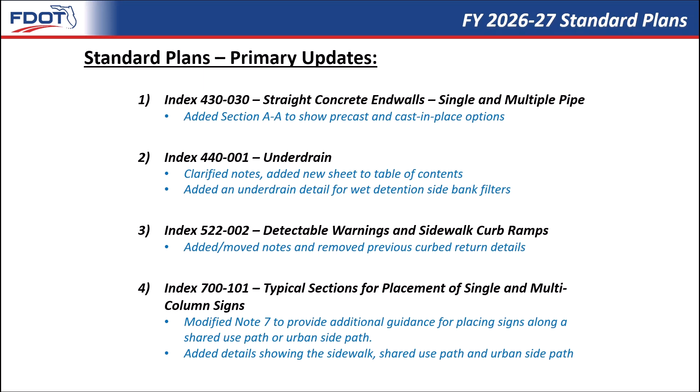Finally, we'll walk through some updates to Standard Plans Index 700-101, where we've modified a note to provide additional guidance for sign placement along various multimodal paths, as well as some general housekeeping items.

Here we have the red lines for Index 430-030, straight concrete end walls, single and multiple pipe. As you can see, Section A-A has been added to show both precast and cast-in-place options.

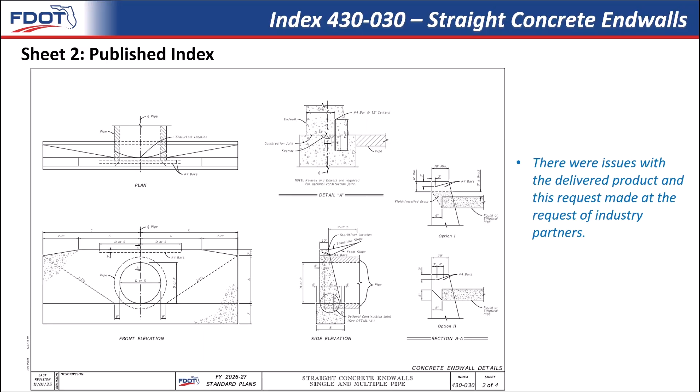This revision was requested via the State Materials Office by our industry partners from the Precast Concrete Structures Association. There were issues with the delivered product, so this addition of an alternate to hole forming and minimum beam height above the opening were included in the index. This update was signed as an approved shop drawing by the state drainage engineer.

And here's a detailed look at that section A-A.

Next, we have updates to Index 440-001 under drain. As you can see in the red lines, the index received a new sheet and the table of contents was updated accordingly. Note 10 was added to ensure an additional 6-inch length of geotextile is anchored under soil or coarse aggregate, and a new type VA wet assembly detail was created.

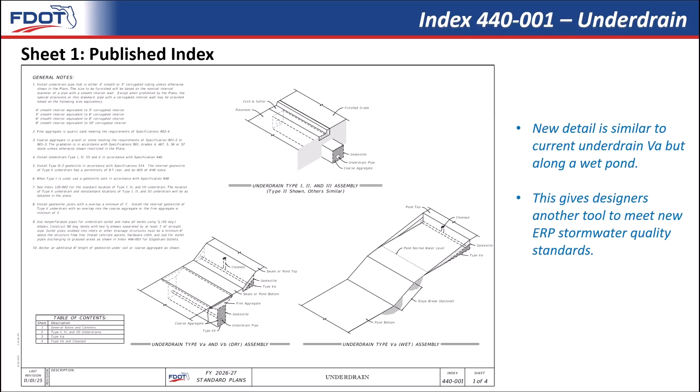Here's the completed published index with those changes incorporated. The new detail is similar to the underdrain type VA and VB, the dry assembly, but occurs along a wet pond. With new ERP stormwater quality standards, this provides designers with another tool to meet those standards.

Here in the red lines for sheet 3, a majority of the changes were to clean up the index and provide consistency with terminology used in other drainage-related areas of our standards. For example, ditch or basin was changed to swale or pond in several locations. Alternative anchor locations and geotextile extensions were also added to the details.

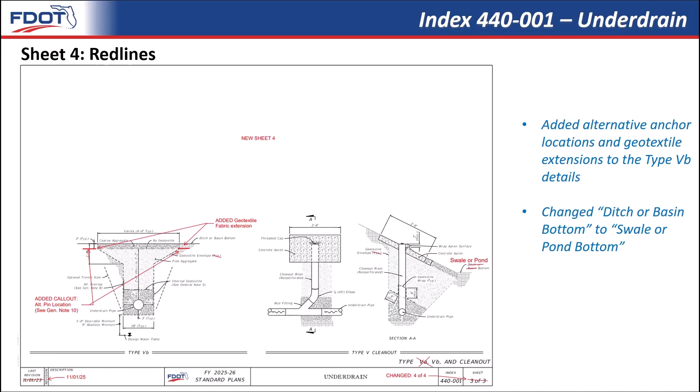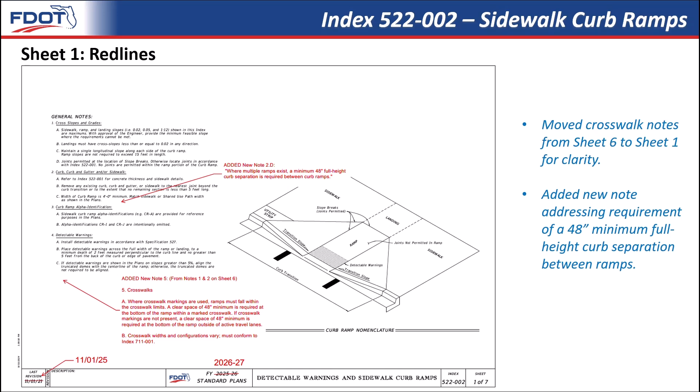Now for index 522-002. Not too many changes made here, just movement of some notes to consolidate all the notes onto the first sheet, with the exception of one railroad crossing note. One note was added to reinforce the requirement of a minimum 48-inch full-height curb separation between ramps where multiple ramps exist.

And here is the published sheet 1. As for sheet 6, notes 1 and 2 pertaining to crosswalk markings were moved to the first sheet, as I mentioned before, while 4 examples of sidewalk curb ramp placement at curbed returns were removed from the index.

This change coincides with the revision to FDM Chapter 222, where guidance and preference of curb ramp placement was provided to ensure a more site-specific design of the ramps rather than one simply selected from the standard plans.

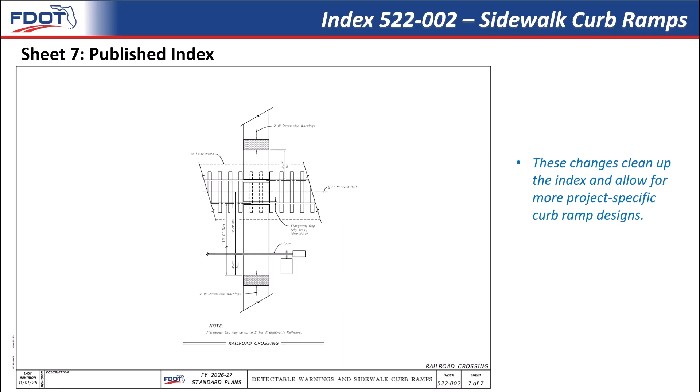Lastly, we'll address Index 700-101, single and multi-column signs. To start, this formerly single-page index has become crowded, so an additional sheet was created to spread out the information for clarity purposes. Details and notes were retained on sheet 1, and the use cases were isolated to sheet 2.

Note 7 was also modified to provide additional information for placement of signs along shared use paths and urban side paths. These notes address avoiding reduction of the accessible width of the sidewalk, providing a 4-foot and 2-foot clear area adjacent to both sides of the shared use paths and urban side paths, respectively. More direction and guidance on these different path types was also provided in the FDOT design manual and will be identified in that update training at a later date.

Here we have the newer, cleaner sheet 1 with the notes and the details, and sheet 2 of index 700-101 with the 10 use cases.

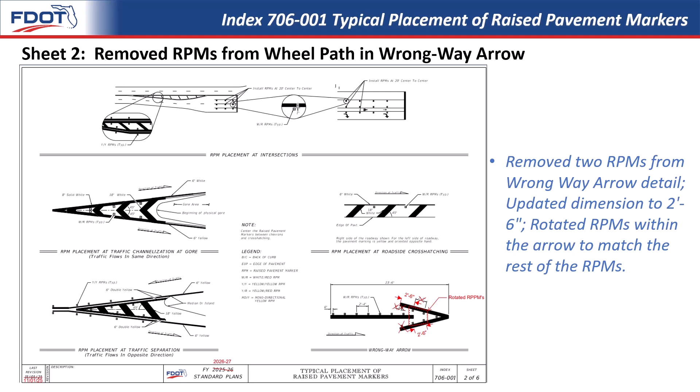Starting off with Index 706-001, typical placement of raised pavement markers, sheet 2 of 6. Here in the red line markup, we see that we removed 2 RPMs for the wrong way arrow detail, updated dimension to 2'6", and rotated RPMs within the arrow to match the rest of the RPMs. Here we can see the updated index with the revised RPM spacing and orientation and the 2 outermost RPMs removed from the wheel path over the arrow.

This change was made in response to district requests to reduce the noise and driver disruption of traveling over the arrow, given the increased usage of these wrong-way driving countermeasures.

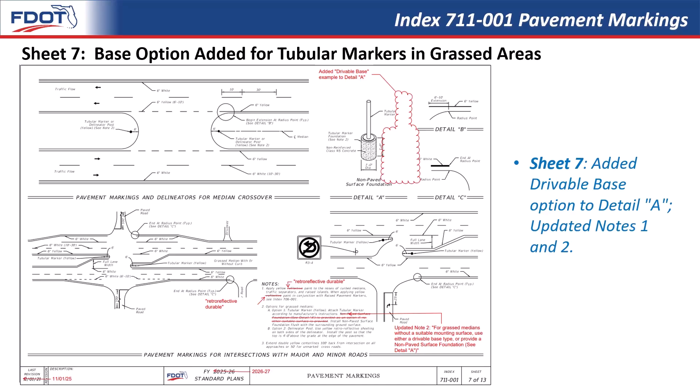Next is Index 711-001, Pavement Markings, Sheet 7 of 13. Here in the red line markup we have added a drivable base option to Detail A, updated Notes 1 and 2. And here we see the new index with an additional Detail A and notes.

This change was made due to requests from industry regarding additional attachment types for tubular markers in grassed areas. It should be noted that these attachment types are not approved for use anywhere other than non-paved areas outside of the traveled way. This change accompanies updates to the standard specifications, now allowing manufacturers with a post passing the Section 991 testing requirements to also add these base options for non-paved areas.

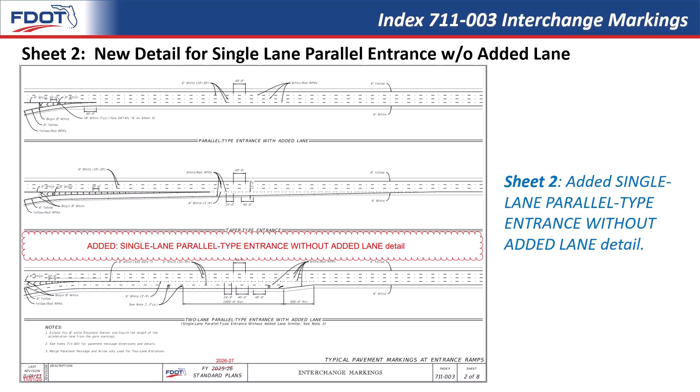Next up is Index 711-003, Interchange Markings, Sheet 2 of 8. Here we have the red line markup showing the added single lane parallel type entrance without added lane detail. And here we have the updated index now detailing a single lane parallel type entrance without the added lane. This change was needed to reduce confusion around the markings used for entrance types when a lane is not added by the ramp.

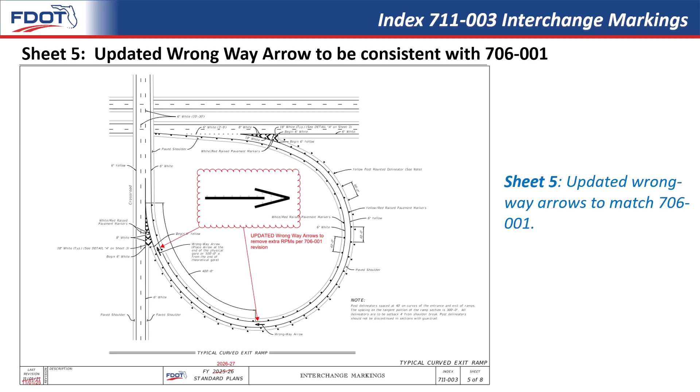Again in Index 711-003, Interchange Markings, on Sheet 5 of 8. The markup here shows that we have just updated the wrong way arrows to match 706-001. And on the new Sheet 5, we now see the updated wrong way arrows with the revised RPM spacing to match the changes to the arrow in 706-001.

Still in Index 711-003, Interchange Markings, Sheet 6 of 8. This red line is a little busy, but it shows that we deleted arrow pointers for 6-inch white lines, changed 12-inch to 8-inch, updated Note 1, added Note 2, added Detail C, added chevron markings to the gores, clarified edge of pavement details, and updated the wrong way driving arrows.

Here we have the updated Sheet 6 with all of the changes. Most notably, the 12-inch white lines have been changed to 8-inch to be consistent with our other gore channelization markings. The 6-inch white edge line along the gore for right-hand traffic has been changed to 8-inch as well to be consistent with MUTCD guidance regarding channelizing lines.

Per the MUTCD, for traffic passing to the right of the gores at the collector end of ramps, the inside edge line adjacent to the physical gore should be a wide white line or a yellow edge line. That determination is based on the size of the gore being outlined. For smaller islands, such as what's displayed in this index, the wide channelizing line can be continued from the theoretical gore right along the physical gore all the way through the movement. For large islands, the channelizing line can be discontinued along the physical gore in favor of a standard yellow edge line.

A second note has been added to this sheet as well to help reinforce the RPM color mandates for whichever option is used. Also in the notes, note number 1 has been updated to clarify the spacing and termination point of the shoulder delineators.

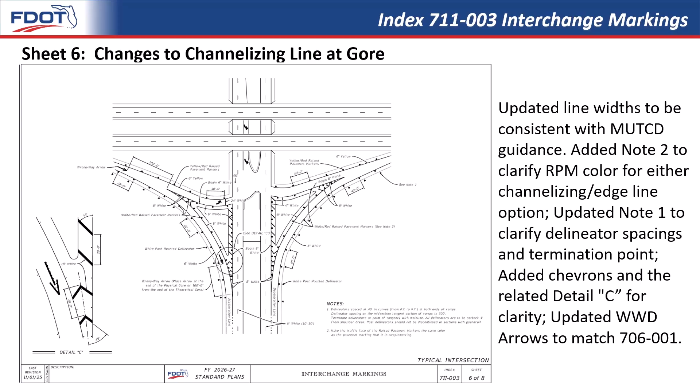Continuing in Index 711-003, Sheet 7 of 8, here are the red line markups showing updated wrong way arrows to match 706-001, and removed edgeline markings from crosswalk areas.

And finally, here we have the updated Sheet 7. As with the rest of this index, the wrong way driving arrows have been updated for consistency with 706-001. Also, a little cleanup was done to remove some extraneous edgeline markings from the exhibit where they pass through the crosswalk.

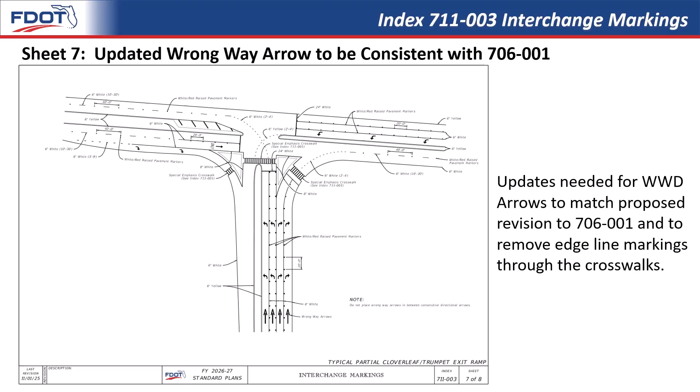Thanks, Ryan. Hey everyone, my name is Shay Gibbs and I'm a standard plan specialist here in the Roadway Design Office, and I've got a few more updates to share with y'all. This cycle, we did a full redevelopment of quite a few of our indexes. These are 4 of them that I'm going to focus on today.

The first one being 550-001. This is our fence type A index. Along with redeveloping, we also added a new wildlife fence detail. Then I'm going to go to 550-002. This is our type B fencing. This one was just a redevelopment that we decided to do along with the fence type A.

Then I'm going to go into index 570-010, shoulder sodding and turf on existing facilities. This one we worked really close with the districts on to make sure that we updated it to more current practices. And then I'm going to go into index 700-102, special sign details. This one is a very large redevelopment, which included renumbering signs, adding new signs, and deleting some of the signs that are in there. Starting off with index 550-001, type A fencing.

On sheet 1, you're going to see a lot of red lines, and I'm going to kind of walk you through some of these changes. We started off by moving all notes pertaining to materials to their respective specifications, whether that be the 550 specification or the Division 3 for steel, timber, and aluminum.

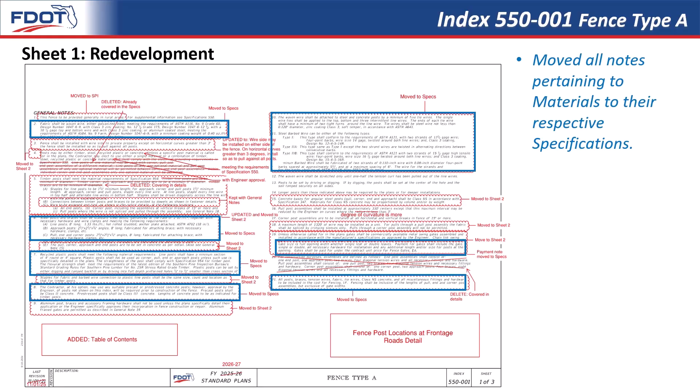We also deleted a couple notes that were already covered in the specifications or already covered in the details within the index. And then because we added that new wildlife fence, we moved the farm fence notes to sheet 2 where we have a full farm fence detailed sheet. And then we also added a table of contents and a detail for fence post locations at frontage roads details.

And I want to point out that we did update this one note. We used to require that the wire side be installed on one specific side of the fence, and we are changing it to allow it to be installed on either side of the fence to allow for the districts or whoever's installing it to make the decision on what's easier maintenance-wise.

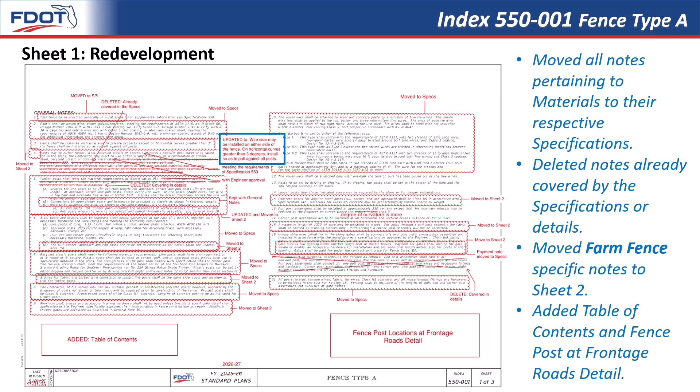Here you can see the full redeveloped index. A lot of the notes are gone, there's much fewer of them, only 10. You can see the new detail in our new table of contents. We're hoping this makes it a little easier to follow along the index.

Going into sheet 2, you can see that we're starting our division between our farm fence and our wildlife fence. So this is our 5-foot farm fence. On this one, you can see we moved the design note to the standard plans instruction for the designer. We also rearranged the index and added a couple more details along with those notes.

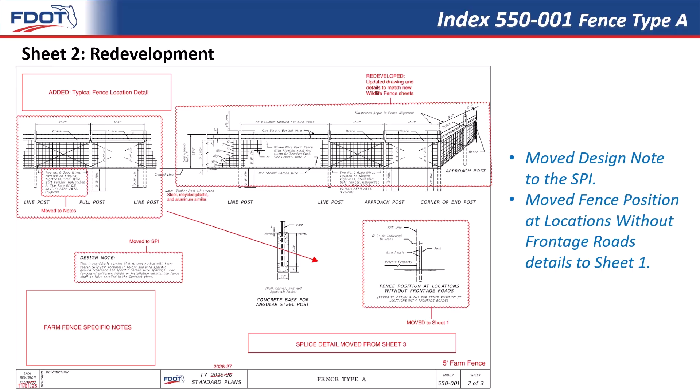You'll see that on the next slide here it looks a lot busier, but it does cover all the details needed for a 5-foot farm fence. You'll see that we added a sheet title to make sure that it's very clear what this index sheet entails. We also added this typical fence detail at the top, which aligns with the rest of the index and gives you a clear view of how the fencing is laid out.

You can see that these details have a little more detail to them, a little more aesthetic detail with the shading. To make it easier to understand and see, we took out some of those larger callouts and moved them into the notes. And then in terms of the dimensions of the fence post, we have it matching what you'll see in the wildlife index.

And then we have our farm fence specific notes over to the left. I also want to note that while you see the 8-foot distance on the details to the right, if you look in the typical fence detail, you'll see that there is an 8-foot typical distance, but you can go up to a 14-foot max.

On sheet 3, this is just a farm fence specific detail sheet. You can kind of see where we moved the fastener and timber post and brace to the last sheet. We moved the splice details up, which you saw before, and made this more just for concrete posts and braces.

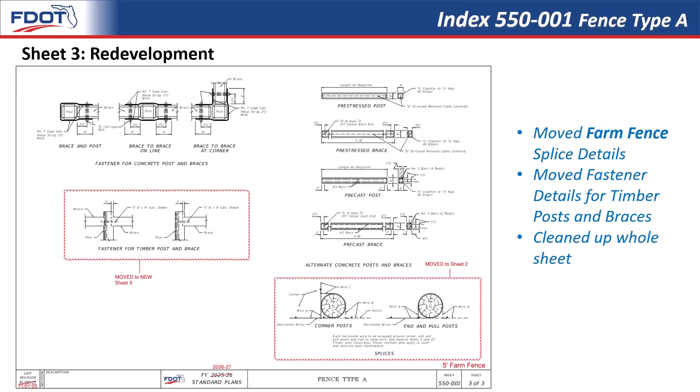This is a 10-foot fence instead of a 5-foot fence. It's much larger. It has a larger gauge fence fabric, more barbed wire along with a larger gauge barbed wire. And I also want to point out that this fence in specific is timber only. Our farm fence covers recycled plastic, concrete, timber, steel, aluminum. The wildlife fence is a timber-only fence.

These details were developed with the help of District 3. They developed them when they were cleaning up from Hurricane Michael and found that these became a bigger need, which is why it got added into our indexes for all districts to have availability for it.

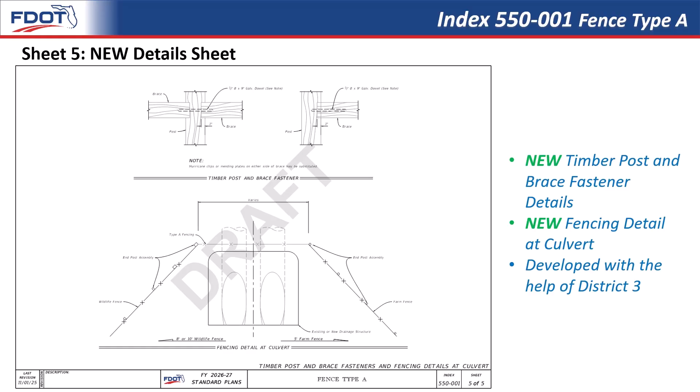And then our last sheet are just some more detail sheets. You can see where we brought in the timber post and brace fastener from that previous sheet. And then you have the fencing detail at a culvert that looks very similar to our typical fence details that you can see on sheets 2 and 4. But this one covers both wildlife and farm fence in the detail.

Next, I'll cover Index 550002. This is our Type B fence. This one just was more of a focus on cleaning up and doing very similar things that we did to our previous index, like moving all of the materials notes to their respective Division 3 specifications, along with moving design notes to the SPI and updating some of the language to plain language, and then adding a table of contents and the same detail of the fence post at frontage roads detail like we had in Index 550001.

Same thing here with sheet 2. You can just see the red lines where we move some of the design notes along with updating the language.

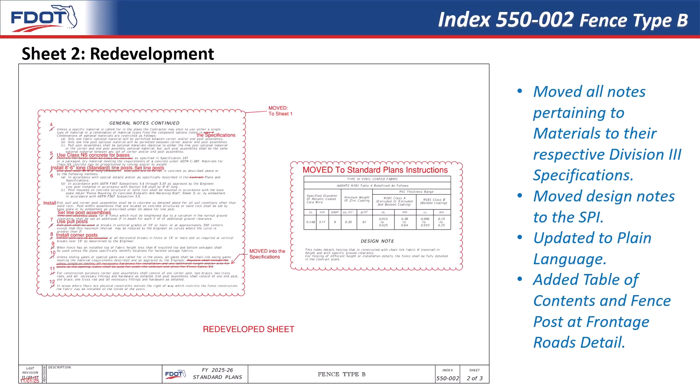Sheet 2 is just some general redevelopment and cleanup. We didn't change much of anything.

But here is the new sheet. You can see we divided up the details into their own sections, making this very similar to how we have our other indexes.

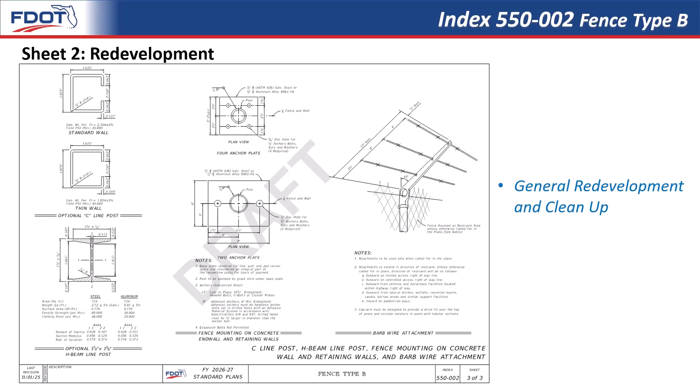Specification 954 is where you'll find the timber requirements. Most of those are covered in the index, but there are a couple that just fit in the specifications, like the flexural strength requirements, and then we also added in some APL requirements.

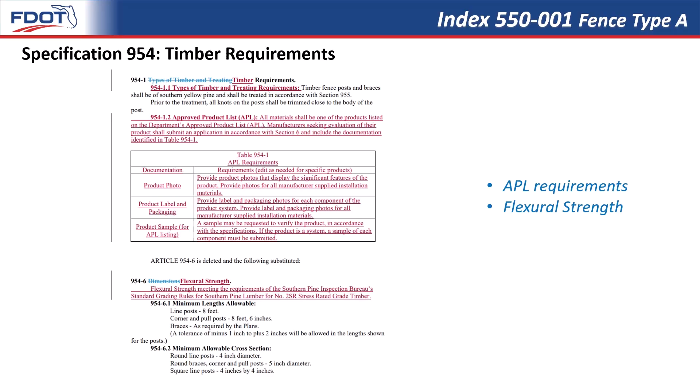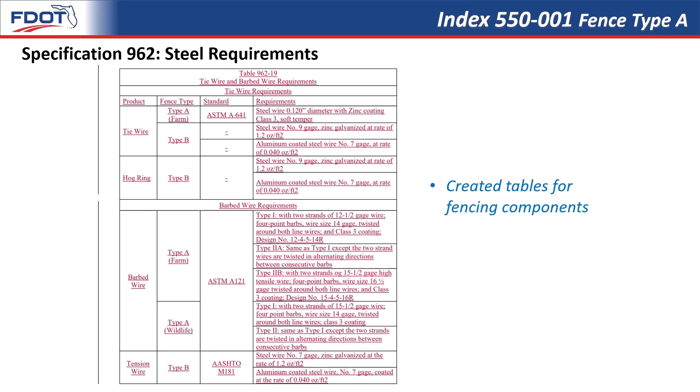The steel requirements, on the other hand, had a ton of details that got moved into the specifications. So you'll see in 962 there is a full section for fence materials, and it breaks out into quite a few tables: APL requirements, fencing fabric requirements, steel post, beams, and pipe tube, and then tie wire and barbed wire requirements.

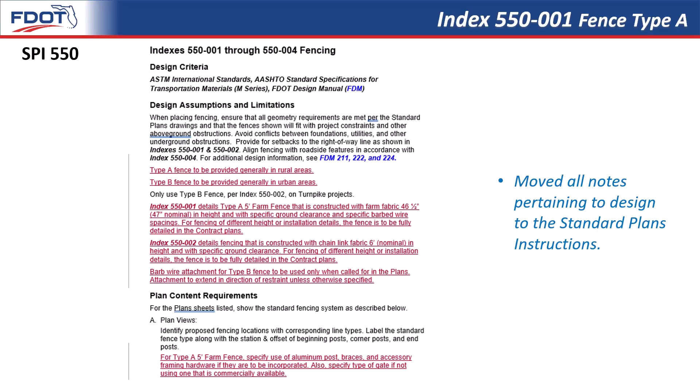Next, we're going to go into Index 570-010, shoulder sodding and turf on existing facilities. This one also went through a large redevelopment from requests from the districts.

We were told that treatments 1 and 2 are not very commonly used, if used at all anymore, so we took those out and replaced them with asphalt overlay details, a shoulder widening detail, and a super elevation detail. To assist with those, we also added a drop-off detail and a sloped sod lap detail.

Trenching or mixing will be necessary when existing turf is flush with or higher than adjacent pavement. Shoulder drop-off soil will be necessary when existing turf is lower than the adjacent pavement, so you'll see this shoulder drop-off soil coming up a lot in this index now.

We found that we needed something to cover the makeup soil needed to bring the dirt up to the pavement level that we need. While Borrow covers that, sometimes that makeup soil wasn't covered properly anywhere. So we established shoulder drop-off soil as a pay item in this index and the specifications to make sure it is understood when to use this type of soil as opposed to Borrow.

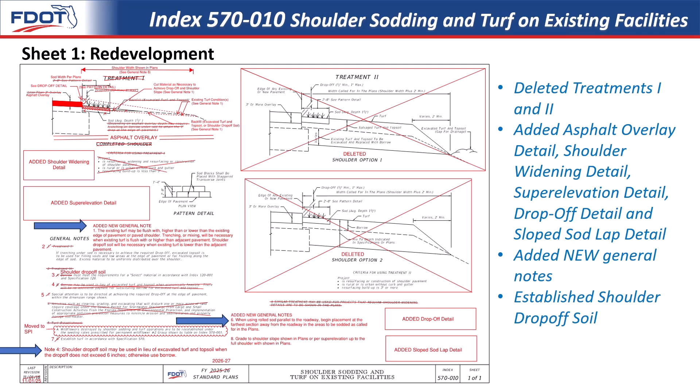And then here you can see this index has completely changed. We have our new details. We have our new notes.

One thing I want to point out is in that pattern detail, this shows palletized sod, but we also added in a note for the minimum 3-foot sod width for rolled sod, as you do have the option to use both.

We also added some language into our standard plans instructions to give a little more guidance and clarity. One of them being for shoulder drop-off soil, assume an average of 250 cubic yards per lane mile of shoulder requiring correction. Adjust as necessary based on field conditions and district experience. Include average cubic yard per lane mile of shoulder amount in the summary of earthwork design notes column. So this is just to help you with your estimation and your quantities.

We also added in a little more language in terms of the sod width with the palletized sod and the rolled sod, making sure that you understand what is typical for those. And then you will see that we very specifically tell the designer to include the shoulder and sod width in the plans along with the shoulder slope.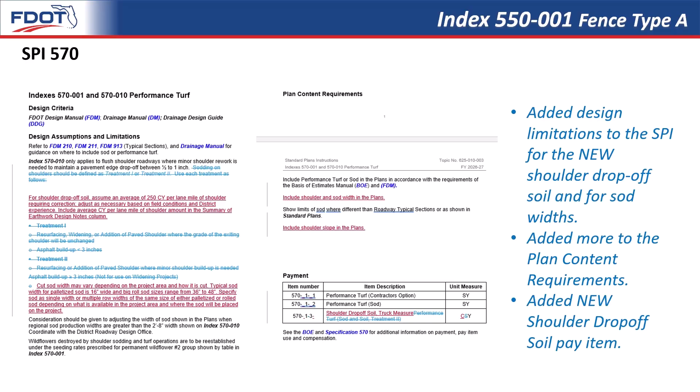And then down in the payment, you can see we added in that brand new shoulder drop-off soil per truck measure payment item.

To help with all of those new details, you can also see we added some language into the specification 570. A lot of this has to do with that new shoulder drop-off soil. It kind of helps understand the testing along with where to put it, along with the quantities.

Specification 120 clarifies very specifically that testing and how if the plans indicate the use of drop-off soil, then no further testing is required.

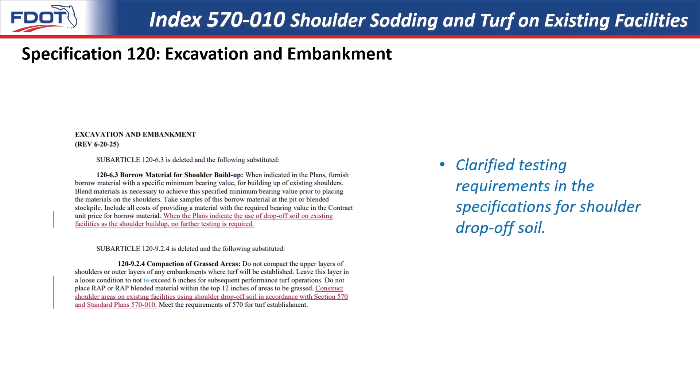Going into index 700-102, this is our special sign details index. I wanted to start with our brand new sheet 1 because this kind of kicks off the redevelopment of this. We did go into renumbering all of our signs based on what is covered in the sign library, the traffic engineering manual, hoping that it'll make this easier to go through the index from now on.

So you'll see we have our numbering convention to help with the renumbering with the FTP and new TTC signs. I'll get into that in a second. But it has the FTP or TTC, your sign type, which you can find next to that in our sign type block there, which covers regulatory, warning and advisory, motorist service, guide, recreational and cultural, miscellaneous, and then our temporary traffic control signs. It then has, you see B and C.

This is kind of our size adjustment or our left and right adjustment. And then all of our new signs currently had the year of update, which would be 2025, which is this year.

We also provided a few examples to make sure that that is very clear. And then you'll see our table of contents, which helps identify where you need to go within this index, considering it is a 21-page index.

And then we added in a crosswalk at the end. So that way, if you go and find one of the older signs, it's very easy to find the new sign number that correlates to it.

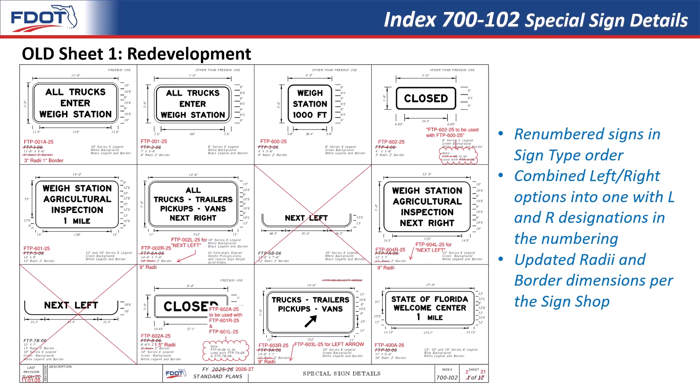On the old sheet 3, this one had a couple other details added along with the renumbering. One of them being note 4, which states that the width varies on the border depending on the digits within that sign. You can see that because it states that the width on the border for the 3 or more digits is E, and then we have our different sign widths in that table below.

The old one gave a very strict 7/8 border, but we wanted to make sure that it is very clear that this is an adjustable border based on the digits within it. We also added a little more clarity over to our county route markers, stating that the Series D legend numbers and letters are all uppercase.

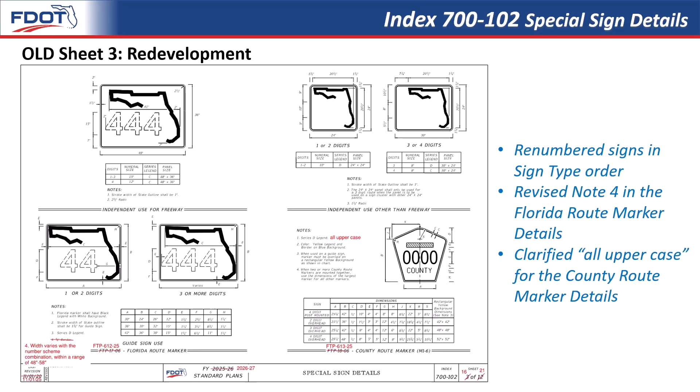On our old sheet 9, I added this one to show that while we have our left and right, we also have our U-turn sign, which we designated with the letter U instead of L or R, down at FTP 034U25.

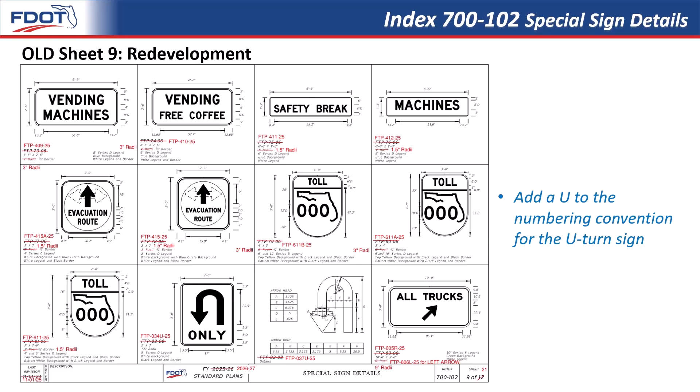On the old sheet 10, all we did was delete this left turn yield on flashing yellow arrow sign. This one is already covered in the MUTCD and no longer needed in this index, because this index is very specifically Florida signs and does not cover MUTCD signs.

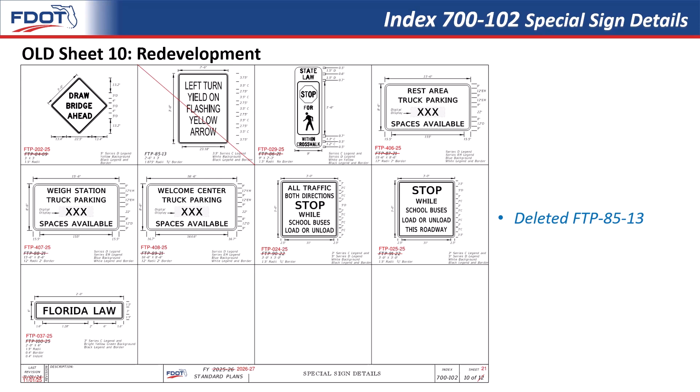We'll start with some of our newer sheets. This is our new sheet 2, which comes right after sheet 1 with the tables and table of contents. The new sheet 2 is our regulatory signs, and on this sheet we added 3 new fender bender signs.

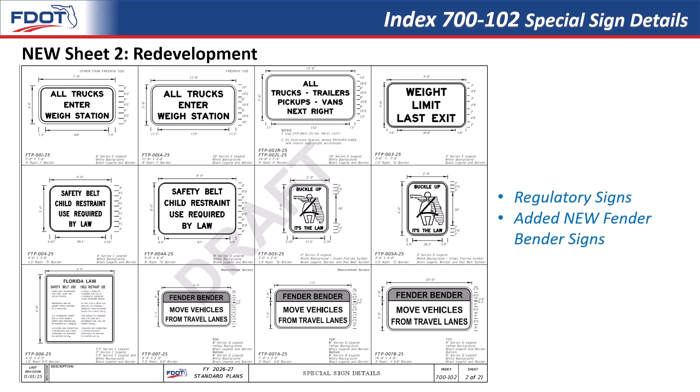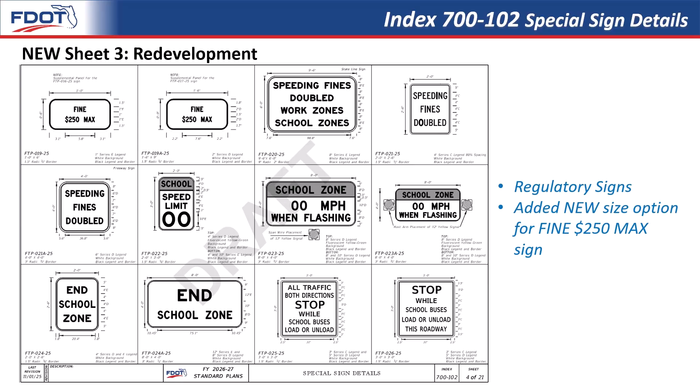On the new sheet 4, also regulatory signs, we added a new size option for our Fine 250 Max sign. On the new sheet 5, still in regulatory signs, we added some new crosswalk signs: FTP 02725, FTP 027A25, and FTP 02825.

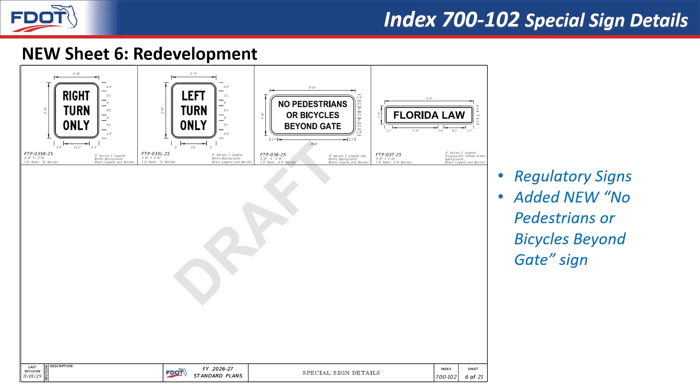Sheet 6 is the ending of our regulatory sign type, but we added a new sign for no pedestrians or bicycles beyond gate.

Sheet 7 kicks off our warning signs. We added a new crossing sign, a new on-sidewalk sign, and a few new motorcycles-use-caution signs, which have a few different size options.

Sheet 8 continues our warning signs, and this covers our new prescribed burn ahead signs.

Sheet 12 goes into our motorist service signs. On this one, we added 3 new share-a-ride sign options along with some new emergency info sign options.

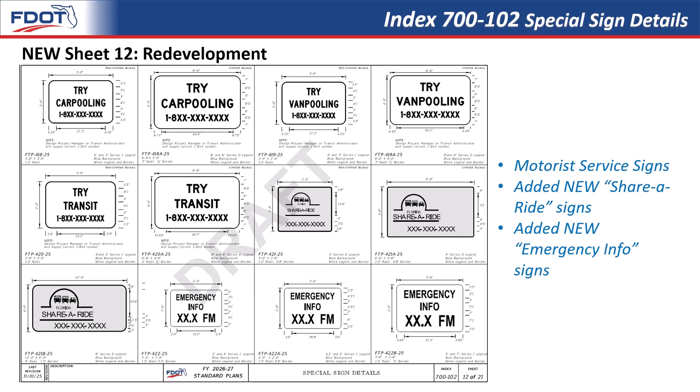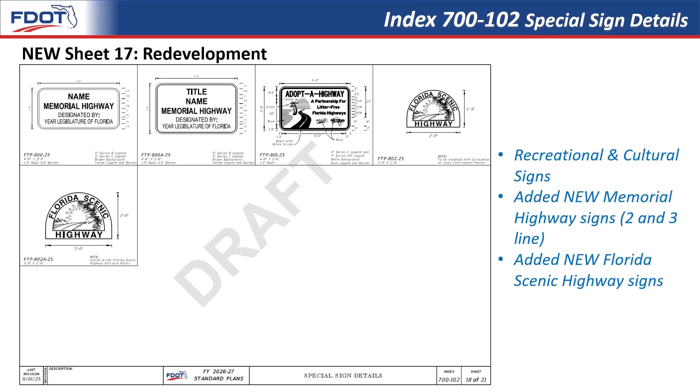Sheet 17 goes into our recreational and cultural signs. We added the 2 new Memorial Highway signs—you'll see it has the 2-line and 3-line option. And then we added our Florida Scenic Highway signs, which also have 2 options.

Sheet 21 is our temporary traffic control signs. These are just the new ones we added: our reduce speed, smoke ahead signs, and other motorcycle-use-caution signs. I want to be specific that these are pink signs, whereas the other ones are orange signs—one is for temporary traffic control, and one is another option for our roadway signs.

And here's just a glimpse of our crosswalk at the end of the index. This covers all the renumbering and makes sure you know exactly where to go if you're looking at an older index compared to our newer one.

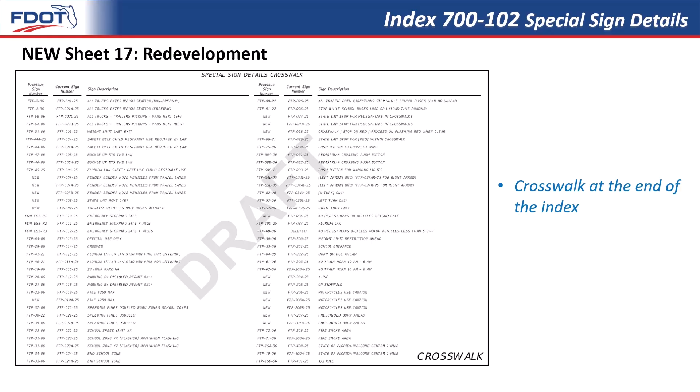Thank you, Shay. My name is Richard Stepp with FDOT Central Office in Tallahassee. For the 2026-27 Standard Plans Update Cycle, I'm primarily responsible for the following.

Type K temporary concrete barrier, adjacent barrier inlets, curb and gutter barrier, concrete barrier, guardrail transitions, post and beam bridge railings, and the larger standard of guardrail. First, we'll look at Index 102.110, Type K temporary concrete barrier, where we've added compatibility for single slope barriers and clarifications to our general notes.

Taking a look at sheet 1 for Type K temporary barriers, we've updated the note heading. It used to mention something about Thrie beam; we changed that so now it says connection to permanent rigid barriers. Per the specs, anytime we're talking about rigid barriers, we're talking about concrete barriers or traffic railings. To be more helpful, we've referred the user to sheets 7 through 10, where you'll find all the various connections to those concrete rigid barriers.

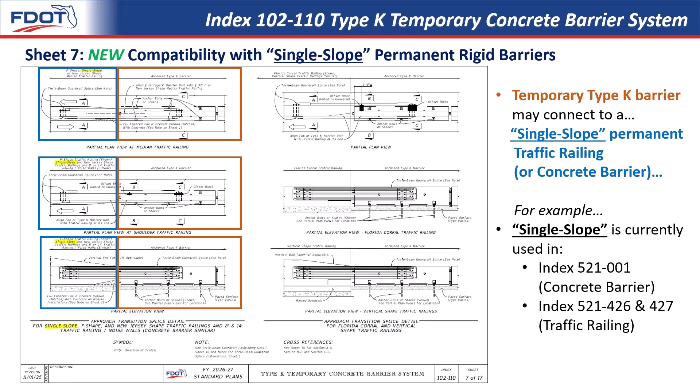The temporary Type K barrier is seen here on the right in the orange rectangle, and the single slope as the permanent traffic railing or concrete barrier is now seen here on the left. For example, single slope is currently used in the new Index 521001 for concrete barrier, and also in Index 521, 426, and 427 for traffic railing. We're going to take a look at 521001 in upcoming portions of this training, so you'll get a feel for what the single slope barrier looks like.

Here we're showing sheet 8, essentially the same thing in reverse direction. We've added the new single slope option to the permanent barrier as something the Type K barrier can connect to. There are several other sheets in this index showing the same thing—just know that the single slope shape as a permanent barrier is now an option throughout.

Now something that's not a revision, but we've been requested to add a reminder for designers and EORs when choosing temporary barriers for your plans. We've recently noticed that some designers are adding too much information in their plans. The standard plans instructions, the SPIs we're looking at here, basically tell designers what not to specify—we don't want to provide too much information or limit the contractor on what they can do.

Part of this SPI, shown in the red rectangle, says designers should not specify the type of temporary barrier outside of the options shown in the standard plans. For example, the designer should not write concrete, not write steel, not write water-filled barriers—not narrowing the contractor down to what they can use.

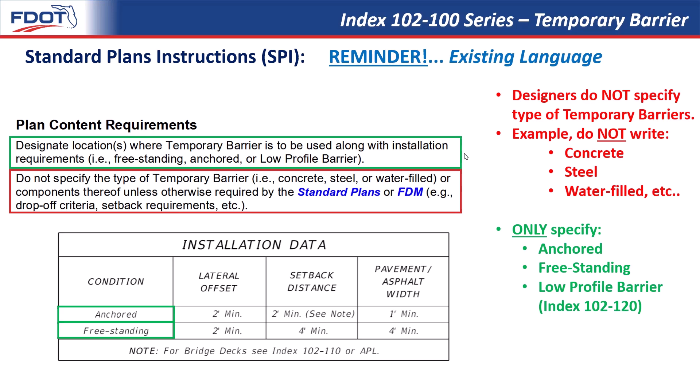So basically the designer would only specify what is shown in the standard plans, and for type K temporary barriers and most other barrier types used for most situations, the only two options are anchored and freestanding. That narrows down what the setback distance would be depending on if you choose anchored or freestanding. An anchored barrier reduces the setback distance. The other type of barrier, which activates a different standard altogether, is low profile barrier. So these are the only three options you'd be calling for in your roadway plans: anchored, freestanding, or low profile barrier. This is information taken directly from the standard plans instructions, so if you need help remembering that, please take a look at those SPIs.

Up next, we're going to take a look at index 425.031 for adjacent barrier inlets. That naming convention basically means there's a barrier adjacent to that inlet. This naming becomes even clearer when you look at the other standard indexes right next to it: median barrier inlet, where the inlet is integral with the median barrier itself, and curb and gutter barrier inlet, where there's a curb and gutter type of barrier with the inlet also integral to that. So for 425.031, it means there's an adjacent barrier right next to the inlet.

A picture's worth 1,000 words, so here you see the inlet right next to that concrete median barrier. The two are not part of the same structure, but the barrier is just immediately adjacent to that inlet. Taking a look at this isometric view, the major change we made for this update cycle is a clarification coming from our drainage office.

We really wanted to emphasize that there's a 2-inch depression, also known as a warp or transition, that's required for stormwater collection. This has always been required in past standards, but it may have been a little more obscure with how it was listed in notes and shown on details. So we wanted to bring it to the forefront. In this isometric view, it's now clearly shown along the vertical portion of the barrier. Once you go below the gutter line, the barrier face that gets exposed is vertical, so now you can see this little indentation in the isometric view fairly clearly.

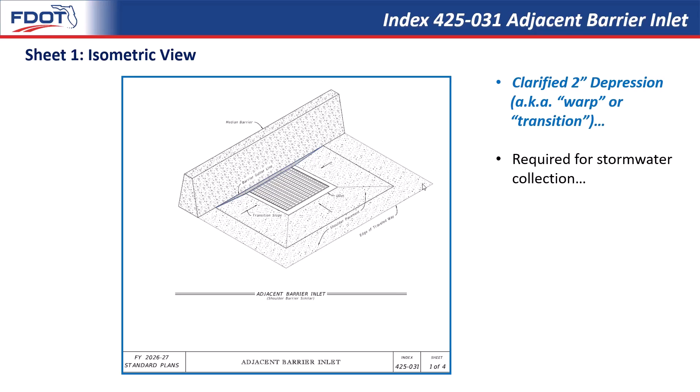It's important to note that this 2 inches is measured from the barrier gutter line, as we've highlighted. In index 521001 for concrete barrier, we highlight that gutter line in various locations very consistently throughout the standard. It's basically the point where the single slope barrier face comes down and turns vertical as it goes beneath the surface of the finished grade. Right at that point where it touches the finished grade is considered the barrier gutter line. For this special case of the barrier inlet, it basically drops 2 inches below the normal gutter line, which will always just go in a straight line. So that 2 inches is measured from that, staying consistent throughout index 425031, just like we're consistent in 521001.

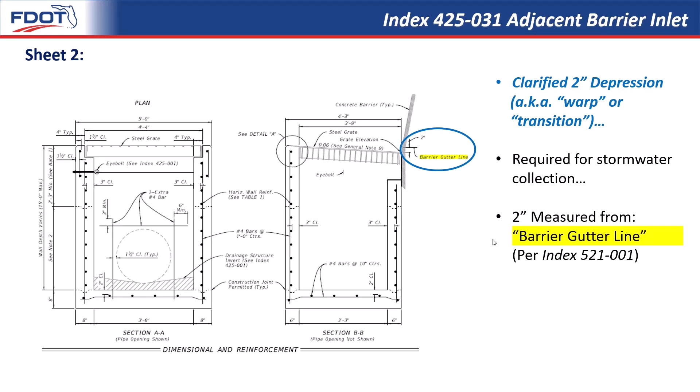Now taking a look at the next page, you can see a section view. It's essentially showing the barrier gutter line, called out right here at the top. Then you've got your clear 2-inch dimension showing where the top of the inlet falls when it goes up against that barrier. I'll note that in the previous year's standard plans version, there were a lot of other notes referring to some obsolete information, so we went ahead and cleaned that up to where we're only showing this 2-inch dimension. Now it becomes very hard to miss for the contractor.

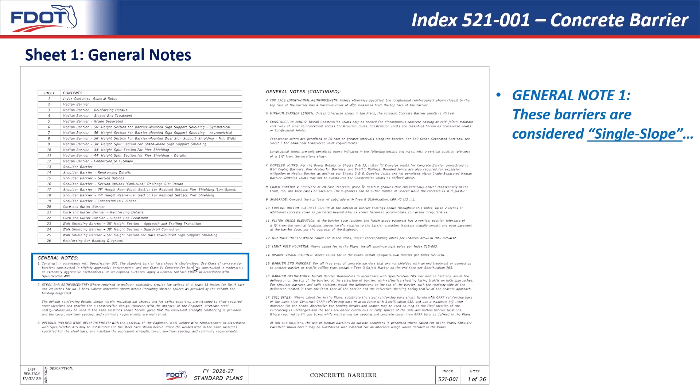But it's good from a contract point of view to square all these things away and have that connectivity. So for example, when you're looking at index 102-110, like we just talked about, with the temporary barrier connecting to the new modern barrier, we can just go ahead and say it's compatible with single slope. Now single slope is mentioned in this new barrier standard, just to verify that that's what we're speaking of.

Also, the traffic railing that goes on bridges is actually labeled single slope traffic railing in the title of the sheet, so that one's a little less obscure. But concrete barrier, in addition to obviously looking like a single slope barrier with one slope going down the face, we went ahead and called it out in General Note 1. That way there's never a doubt moving forward.

General Note 7 is talking about dowel joints—that's also on the next slide, I'll show you what that looks like. Speaking of General Note 7, dowel joints, we wanted to make a note now, and even though this was already stated in the past, we just clarified it even further, saying that dowel joints may not be substituted for construction joints. It's two different concepts.

A construction joint is basically where you stop and start the casting of the concrete. It has to have continuous reinforcing steel going across the joint. It's different from a dowel joint, which simply has dowels going across the joint—that's defined for a specific usage. So General Note 7 says you can't substitute dowel joints where there needs to be a construction joint. We heard that some contractors were trying to take advantage of that, not understanding the difference between construction joints and dowel joints, which are listed for different usages in two different notes. So those are not the same thing.

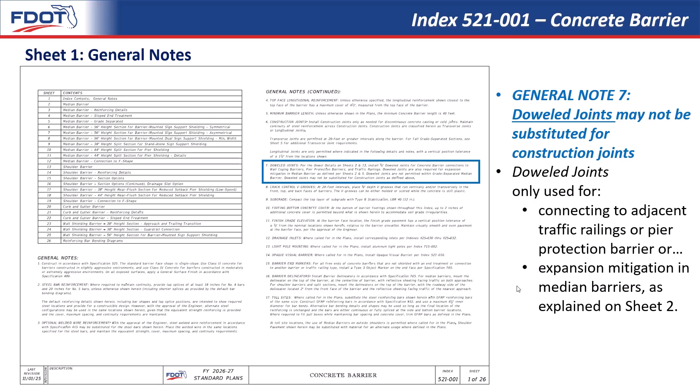They're only to be used or explained basically for connecting to traffic railing, which is something different, or for expansion mitigation within the spacing range that's called for. We'll go ahead and explain that on the next sheet.

Previously, only the maximum spacing of 100 feet was given. To assist with the expansion mitigation, the maximum would be the concern that governs. The idea was that contractors would not want to use these more than they had to, so we limited the maximum size. That said, we had heard that maybe some contractors are taking advantage, so we went ahead and reined this in a little bit.

Now a minimum is given to assist with preventing the misuse and violation of the minimum barrier length, which is 40 feet. That 40-foot minimum corresponds with the minimum barrier length of 40 feet. So in summary, there's now a clearly defined range that can't be misinterpreted, where the expansion joint needs to be placed within a 40-foot to 100-foot spacing. Generally, it should be towards the high side wherever possible.

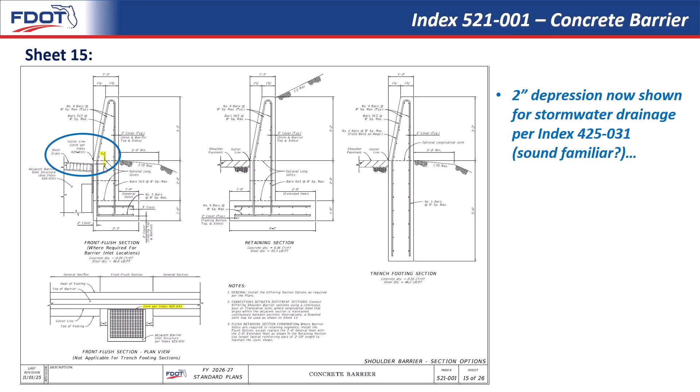Now shifting gears, looking at sheet 15, we again have our 2-inch depression, which is now shown for stormwater drainage per index 425-031. This should sound familiar, and the drainage group is happy about this - it clearly shows all locations that that inlet is 2 inches below the gutter line, which is the result we should get now in the field consistently.

In this slide we highlighted the gutter line, basically the bottom of that single slope shape, and then this is where it goes vertical. Where it goes vertical on the concrete is typically where the shoulder pavement and the finished grade would be. That gutter line is called out consistently in all locations throughout the standard. In this case, if there happens to be an inlet there, then finished grade is a little bit lower because finished grade is the inlet itself, and that goes 2 inches below. This all ties together with index 425-031 nicely.

Okay, so we're making good progress - 2 standards left. Up next is another pretty minor revision, but it's an excuse to talk about some larger topics, and then we'll lead into our last topic of guardrail, which is a little bit larger. So now we'll bring your attention to 521-404, guardrail transitions for post and beam bridge railings and basically how to connect to those things.

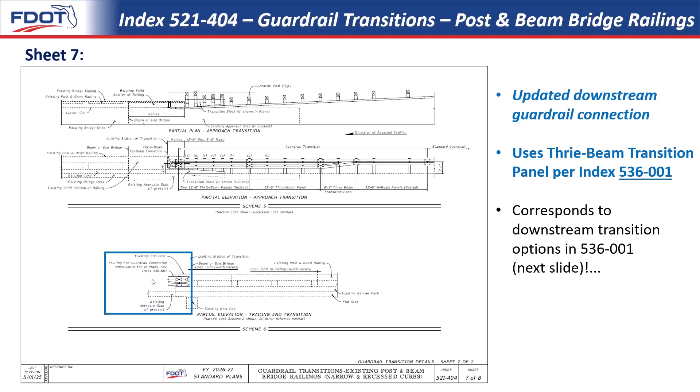Since we're referencing 536001, it's a good opportunity to advertise a little bit the type of details shown in 536001. So it shows you the bigger picture - you can see how it connects on the downstream end.

In addition, some recent additions we've made in recent years clearly show, even on a downstream end, how the guardrail continues and then tapers over for a lateral offset, depending on the type of curb and gutter situation you have.

If you're connecting to a shoulder gutter section, shown here on the right, you'll need to transition the guardrail over laterally as it comes off the bridge traffic railing. So we went ahead and showed you how that taper works.

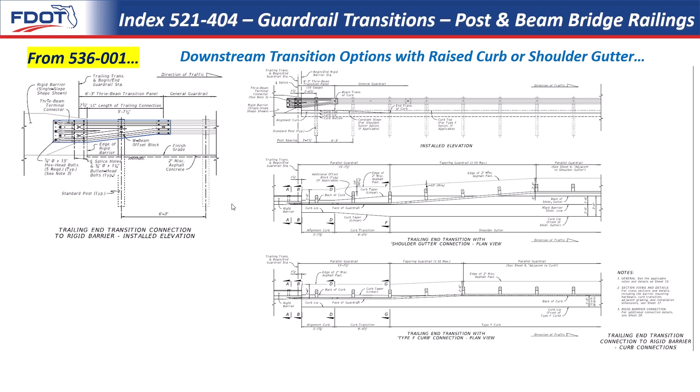And the same thing if you're connecting to a type F curb, you'll need to transition over to get the correct offset as shown in the FDM. We handled that for you as well in a plan view, so all those cases are now covered. You just have to take a look at index 536001.

Last but not least, we're looking at index 536001 for guardrail. This is one of our more consequential changes, where we've basically removed the TL2 guardrail option—that's the recurring 12-foot 6-inch post spacing, which I'll show you graphically in a minute. We've added a new connection to the 27-inch height existing guardrail, providing drawings for what had previously been given in a note. We'll show you those things visually.

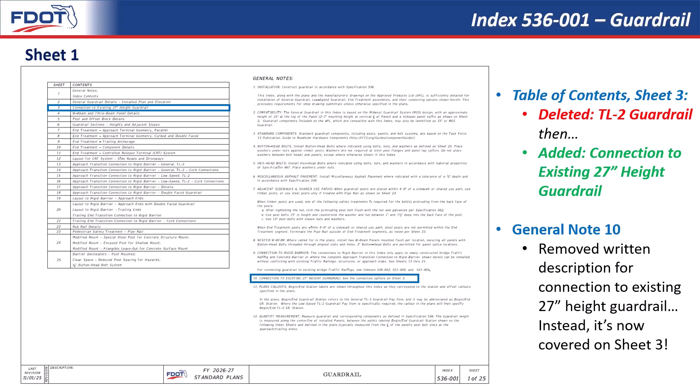To make this happen, in the table of contents, sheet 3, we've deleted the TL2 guardrail, replaced with the connection to existing 27-inch height guardrail—those details were added by popular demand. Following suit, in general note 10, we removed the written description for the connection to existing 27-inch height guardrail. That had previously all been described in words on how to handle the connection to the existing shorter guardrail. Instead, it's now covered on sheet 3, which we'll get to in the upcoming slides.

This was added back when MGS guardrail was added many years ago. It was thought it could possibly be a cost-saving measure if you had a speed of 45 miles per hour or less, allowing use of a less robust guardrail system. That said, after years of use, we've looked at our pay item history and discovered there truly wasn't much cost savings comparing TL2 to TL3.

Also, moving forward, the vehicle fleet on our roadways is getting larger and larger. We know we have challenges with things like electric vehicles getting heavier, harder to redirect with guardrail. Even TL3 MGS guardrail with double the posts is right on the threshold for being able to redirect vehicles. So for all these considerations, and knowing there really wasn't much cost savings as originally expected, the decision was made to remove the TL2 guardrail.

One other advantage to removing the TL2 guardrail is simplicity for designers and engineers. One of the major remaining questions we were routinely asked was about compatibility between the various end treatments, TL2 and TL3—more options tends to cause more confusion. Even if it's labeled clearly in all the standards, the different options will always add doubts and questions. So now it's going to be a lot more straightforward moving into the future.

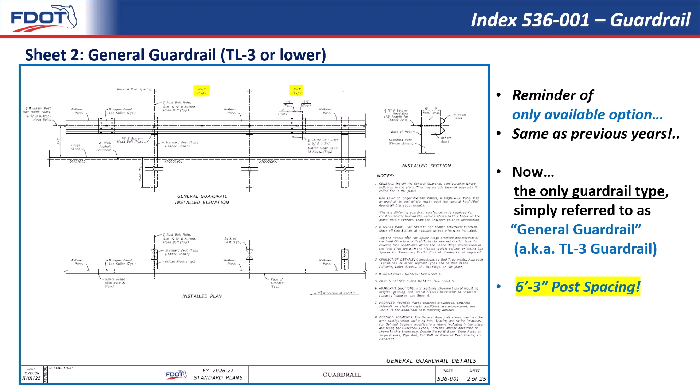Along with this change, we also updated the SPI to help better explain how these different parts and pieces are used and get connected together. It really doesn't need to be the case where the TL2 connects to a TL2, or a TL3 connects to a TL3, especially going forward. We want to make the point that the different test level options are compatible so long as you're meeting the roadway's design speed requirement.

In the very beginning of the SPI, Part A, it basically explains the general guardrail is used, it's the only choice. General guardrail is considered TL3, and TL3 means all design speeds. The end treatments, such as the approach terminals and crash cushions, still have two test level requirements because this is where you can see some cost savings and space savings by using TL2 versus TL3. So the end treatments will have a TL2, which applies to design speeds of less than or equal to 45 miles per hour, and a TL3, which applies to all design speeds.

It's the same thing for the connections to rigid barriers in the standard plans. The TL2 and TL3 options will still be there depending on the design speed of your roadway. If you have less than or equal to 45 miles per hour, you could take advantage of the TL2, save some length, and use a less robust system. But for TL3, you would use all design speeds. The main point of this is to give a reminder in the opening paragraph that there are those different test levels to consider. General guardrail is just TL3, but all are compatible with general guardrail.

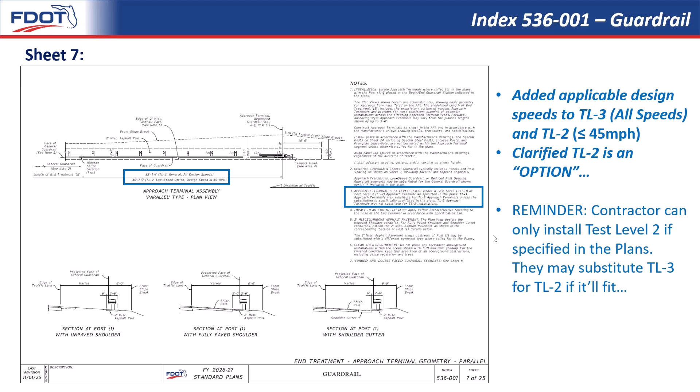We want to add that reminder that the contractor can only install the TL2 if it's specified that way in the plans, and it's specifically said that way in the standards. Basically the EOR, the designer, governs if TL2 is acceptable or not - the contractor can't just pick that one. Anywhere in the standards there's a TL2 or TL3 option, it will say 'as shown in the plans,' so we know the EOR is the one governing that with what they put in their plans. The contractor can't just choose.

One thing I will say is that unless it's otherwise shown in the plans, the TL3 version, which is for all design speeds, can be substituted for a TL2, but not the other way around. So the TL2 is really the more specific option that needs to be allowed by EOR, and TL3 can almost be used anywhere at the contractor's option, unless the designer says they can't do it for some reason. That should be fairly intuitive.

Going to bring up this point again that regardless of if it's TL3 or TL2, these things are all compatible with general guardrail. You'll see throughout this standard pretty consistently, you could have a TL2 or TL3 option, but then on the end of that, it just says general guardrail and there's only one type. So there really shouldn't be any confusion over that anymore.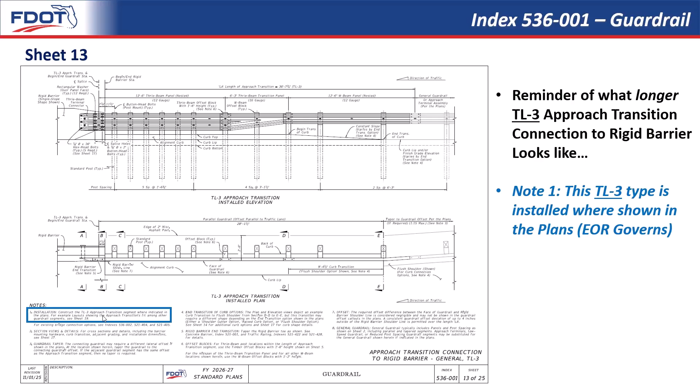That note reinforces the idea that you construct the TL3 approach transition segment where it's shown in the plans. Skipping to sheet 15, this is the reminder of what the shorter TL2 approach transition connection to rigid barrier looks like, and clearly it's much shorter than what we just looked at for TL3.

TL2 is less robust, for lower design speeds, meant to handle lower speed impacts for 45 miles per hour or less. Just like TL3, note 1 says this TL2 option is installed where shown in the plans, so again the EOR governs. The contractor can't decide to just install TL2 because they feel like it—the EOR has to govern that decision based on the design speed of the roadway.

Because note 1 locks that in, the contractor can't choose their own option based on design speed. The design speed added to this sheet is really more for the benefit of the designer and the EOR to understand the differences in the options they're picking. It isn't here for contractor choice, but we added this information to the standard plans to make it obvious what the TL2 option is intended for, so first-time users understand when fitting these systems into their contract plans.

Particularly for the TL2 version, we want to emphasize that this is an option. TL3 would tend to be the default, while TL2 is a little more optional, a little more conditional. TL3 can be used for any design speed, TL2 cannot, so we added the word 'option' to make it more obvious that this one especially needs to be purposefully selected by the EOR, the designer.

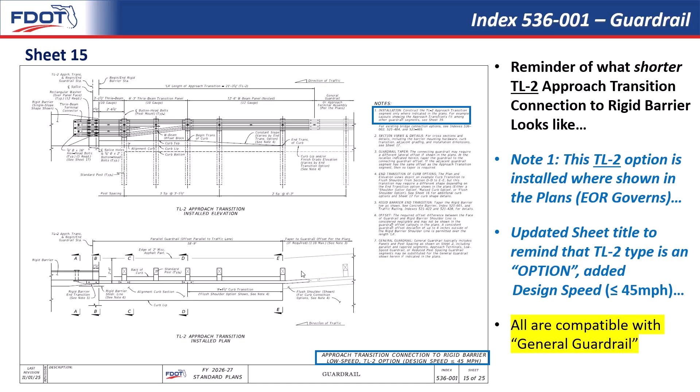Even if it's TL2, regardless of the design speed, you go ahead and connect to general guardrail because general guardrail is compatible with everything. If you notice, the 6 foot 3 inch post spacing shown here is general guardrail, not the old larger post spacing of the TL2 guardrail. That should be pretty clear moving forward.

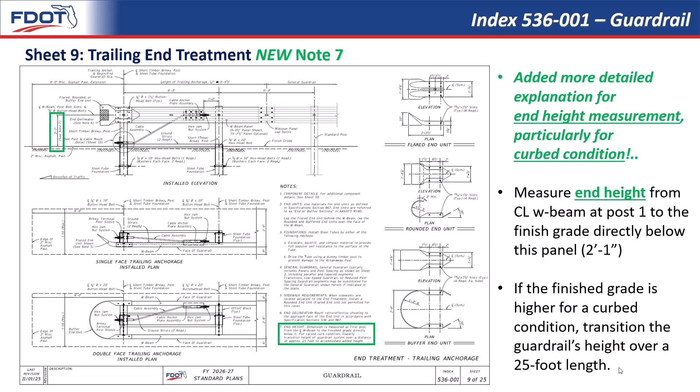And so the second part of that Note 7 explains if the finish grade is higher for a curb condition, you transition the guardrail's height over the 25-foot length to compensate for that difference in where you measure the height of a regular guardrail versus where you measure the height for the end treatment.

And so this concludes my portion of the Standard Plans Update training. Again, my name is Richard Stepp. Please reach out to me at any time if you generally have questions in the areas of lighting or roadside safety, and I'll be sure to get back to you.

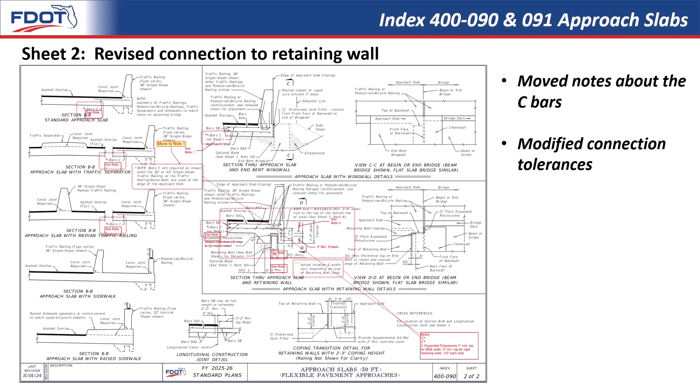Zooming in here, you can see in the green box that we changed the 3-inch minimum from the top of the wall to the underside of the coping to 1 inch for MSE walls. In the blue box, we have relaxed the minimum embed to 2 inches instead of the 9.

The reason for this is that MSE walls come in precast panels, and when they build the wall, they are given an expected wall settlement amount. If or when there is less settlement than anticipated, the top of the wall elevation ends up being too high. The contractor then has to come back in and saw cut all the top panels to achieve the correct elevation. By allowing up to 2 more inches of embedment of the wall into the coping, if the settlement doesn't occur, then the time-consuming process of saw cutting is eliminated, along with its inherent risk to personnel.

The first thing we did in 450-453, the 18-inch Florida slab beam standard, is we added hook bars in the optional exterior beam section, which you can see in the blue box. We did this because in the current detailing, in the top left corner, there's a chunk of unreinforced concrete.

The next thing we did was increase the length of the 5Z bars. While doing some updates and checks, we found that for this FSB, it experiences increased tensile stresses at the beam ends during the release of the pre-stressing strands, particularly in longer spans where more bottom strands are required. To improve resistance to these stresses and mitigate the risk of cracking, we extended the length of the existing 5Z bars to develop past the critical cross-section location from the beam end.

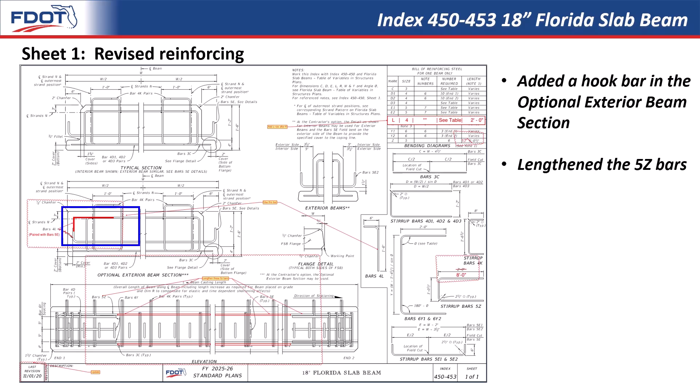For 455/30, the 30-inch square pre-stressed concrete pile standard, we tightened the pitch of the spiral tie spacing. There has been some vertical cracking observed in hollow core pre-stressed concrete piles, including this pile. In an effort to reduce the chances and effects of this cracking, we have decreased the tie spacing.

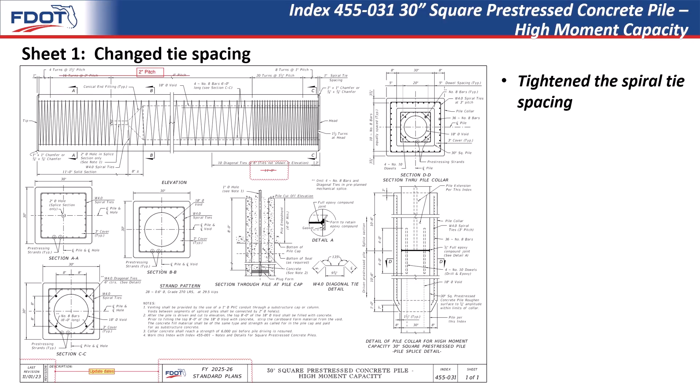We did the same thing in 455/31, the 30-inch square pre-stressed concrete pile with high moment capacity, and also the 455/60, the 60-inch pre-stressed concrete cylinder pile.

For the 521/422 traffic railing standard, we added the option of a mortar plug at intermediate joints. Contractors found that the pre-cured silicone sealant was costly, time-consuming, and sometimes difficult to apply. The mortar plug accomplishes the same purpose, but with ready materials that can be applied during forming or shortly thereafter. We've added this similar option to all relevant bridge traffic railing standards.

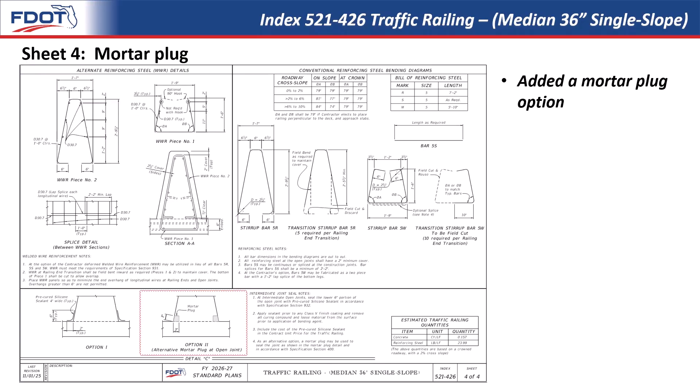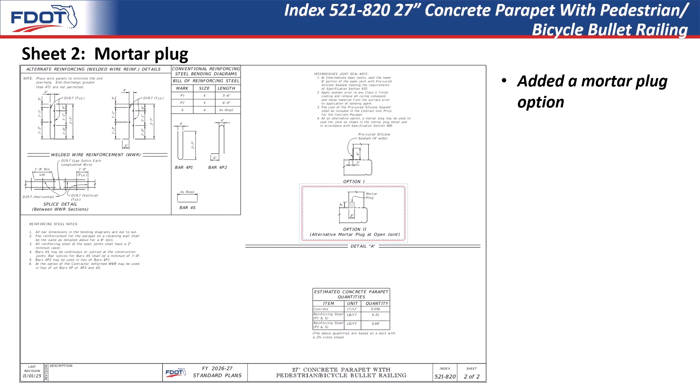These include the 32-inch vertical shape, the 36-inch median single slope, the regular 36-inch single slope, the 42-inch single slope, the noise wall traffic barrier, the concrete parapet with pedestrian or bicycle bullet railing, and finally the 42-inch concrete pedestrian or bicycle railing.

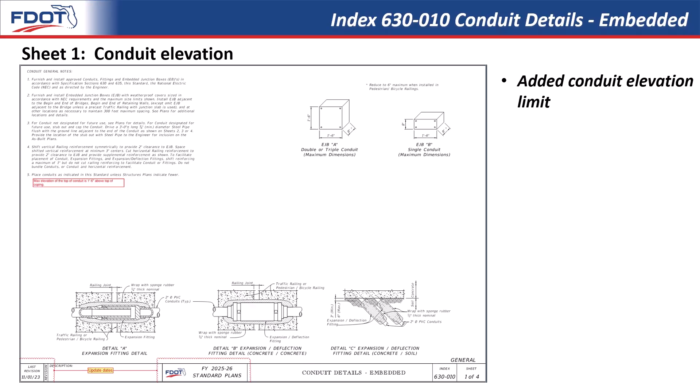For 630-10, the conduit detail standard, we set a height limitation for the conduit in the traffic railing to be a max of 1 foot 6 inches above the coping. You can see this max elevation indicated in these elevations, and finally, in this elevation.

We did this because, as we will see in Standard 712, sometimes attachments are added to the traffic railing, and the anchors for these attachments can conflict with the conduit, and it's difficult to ascertain the exact location of the conduit in the traffic railing once it's constructed. If the standard is followed, then by limiting the area where the conduit can be, we know that there is a safe area to add anchors.